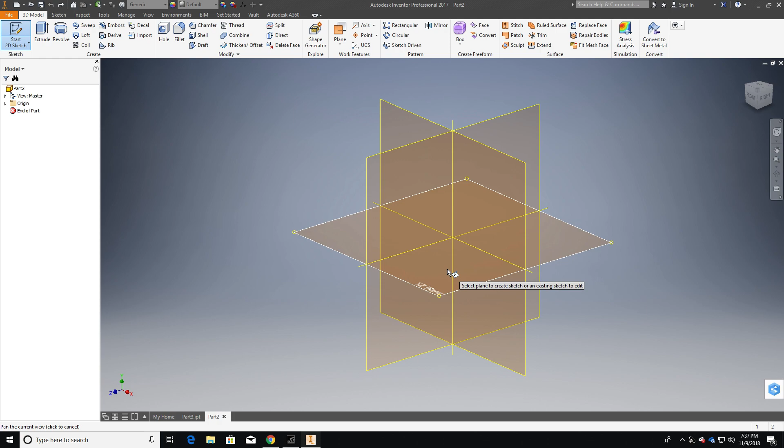Okay, so I'm going to show you how to do figure 3 and eventually get into something that looks around something like this, starting from a blank file. So you want to click Start Sketch. I'm going to be starting from XY plane. Doesn't really matter what you choose as long as you follow a similar pattern that I do, and you'll eventually have the same figure as the one shown on the paper.

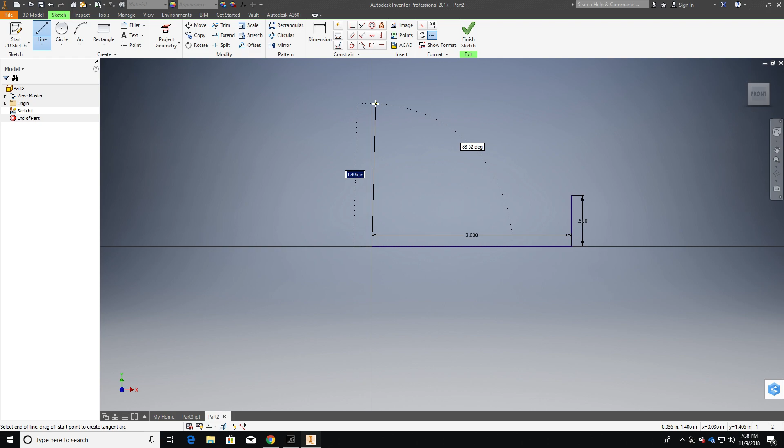So what I'm going to do now is I'm going to build the base shape from the figure. So we're going to go to 0.5, and then we're going to move on over here, make this 2 vertically. I'm going to move 0.5 horizontally, and you're just going to connect those two.

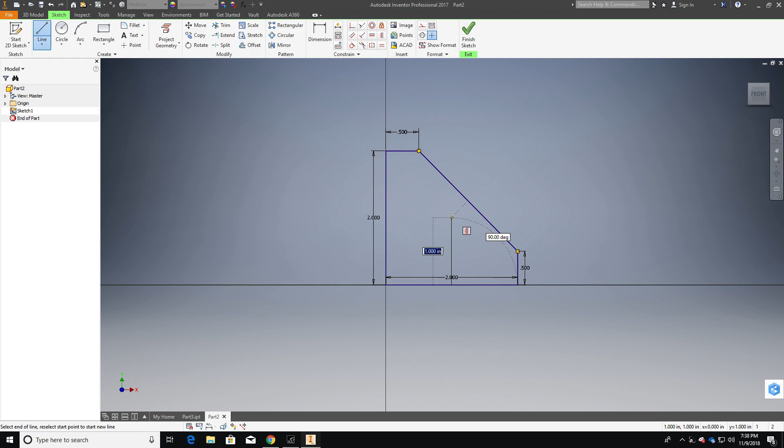Now if you do notice on the figure there is a circle, you will need to do that in the sketch. So I'm just going to find the center point of the 2-inch bottom line, and you want to make it 1 inch. Just type in 1 inch. Then you can start making a center point circle. I'm going to make the first one 0.5 and the second one just 1 inch. Now if I am wrong when it comes to the circles, you can just change it, so it's no big deal. It's not a loss really.

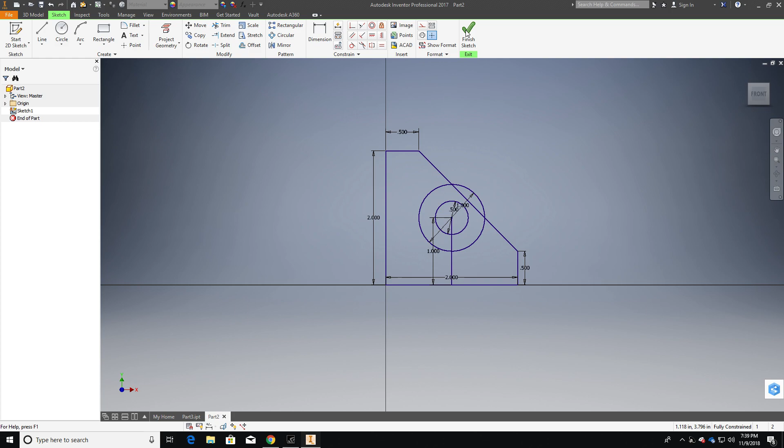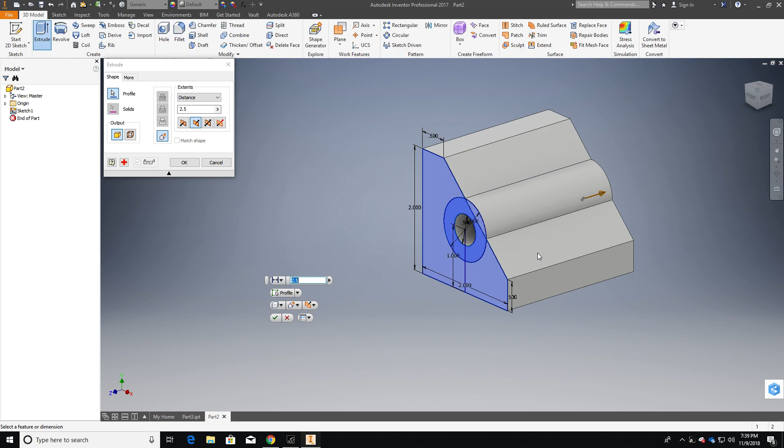You're done with the first sketch, so you click Finish Sketch. Then you want to click Extrude. Make sure you get all these parts, because if you do not, then it's not going to come out right. Make sure you highlight this one too, so you get that nice rounded edge. And you want to extrude it the opposite way. You will be extruding it by 2.5 inches. And after you have that, you just click OK. So now you have already something that looks fairly similar to your third figure. Now we're going to probably finish this in around 2 to 3 sketches more.

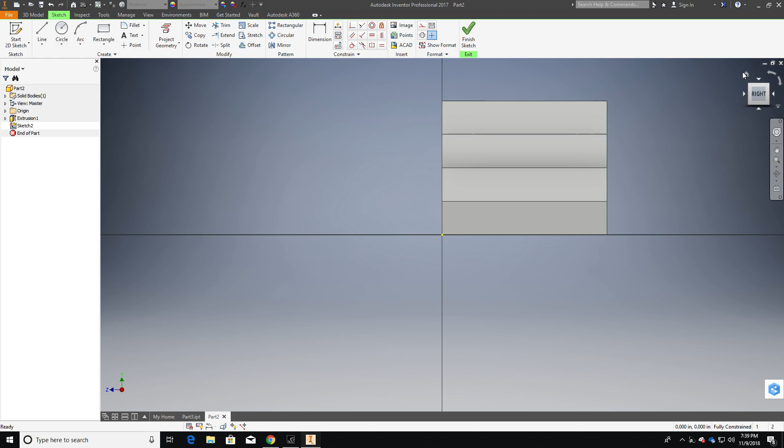So you're going to click Start Sketch, and you want to click on this one right here. So now after you're done with that, we get in an isometric view, and you want to click Project Geometry and click on this one. It just makes it extremely easy, extremely simple to do. You're going to get this yellow rectangle on the top, and that's where you're going to be building your gap. So we know that between that gap there are 1 inch lines, so we're going to make those just as a reference.

Oh shit, let me correct myself. Alright, so you make sure they're automatically constrained. Okay, now that we have both of our reference lines, now we can start making our gap. So the way I did it is fairly simple. I just got a 2-point rectangle. I made it 0.5 by 0.5. Then after that, it's just extremely easy.

Now all you have to do is extrude it. Extrude. Make sure it goes the opposite direction. And here's the important part. You're gonna make it 0.5, so that you have your nice gap, and be sure you click the second option here that says Cut. If you do not click it, it's not going to look right. After you click Cut, you just simply click OK, and boom, you have your extrude right here. After that, you can click Finish Sketch. I've already clicked Finish Sketch, so I'm good. You can make a second sketch, but you can also do it in all one sketch for the top one, so I'm just doing an extra one.

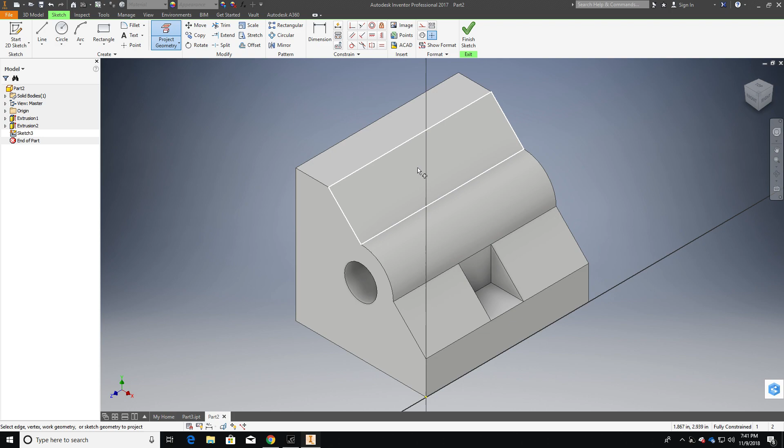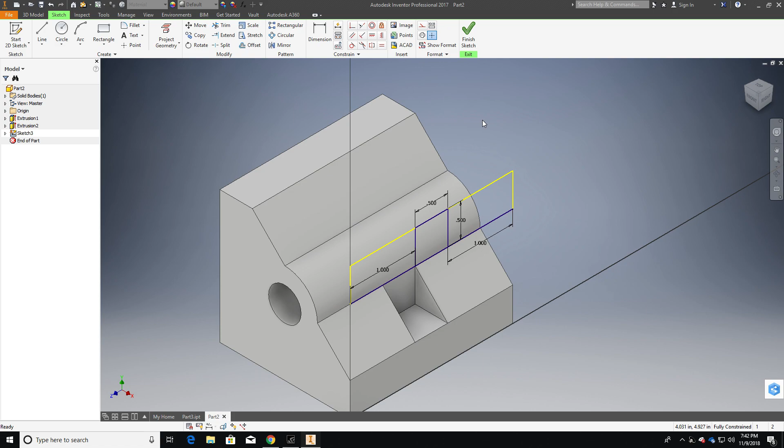So click Start Sketch. I'm just going to start from the same place and make a new sketch. I'm going to project geometry right here, and I'm going to make my reference points. I know it looks a little weird, but bear with me. It'll start to make sense. Make 1 inch on the other side and 1 inch on this side. And then you want to make the rectangle again. And keep in mind, he may be doing a demo for this, so I may be doing it in a completely different style that he may not even allow. But this is as close as I was able to get.

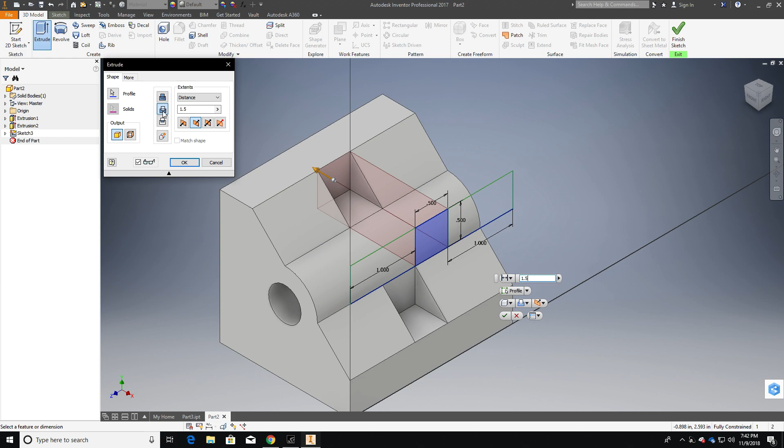So after that, you want to do the same deal, but with a catch. You want to do extrude, and you want to click the opposite direction. And this time you want to compensate for the distance you have, so we're going to do around 1.5. Okay. So now that you have that, you want to do the cut option again, so you get that nice cut, and you want to click OK. And boom, you got your figure.

When it comes to these lines you see here, I'm not sure about that. Maybe there's a tool that'll fix that, but I'll have to ask Coco when I do get back on Monday. But there you go. You have your figure 3. Looks about right. There you go. Whether you put this in a drawing is up to your choice. And that's it.